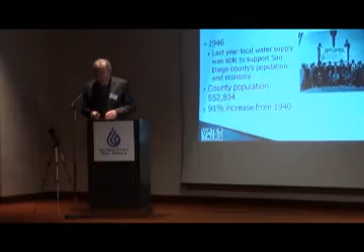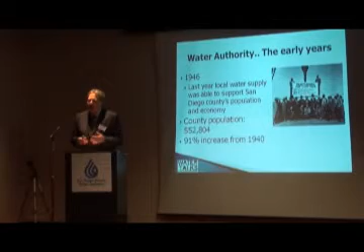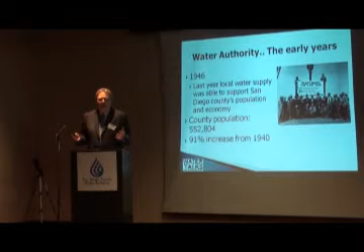Let me talk a little bit about the history of our imported water system. In 1946 was the last year that the county relied on its local water supplies to supply the population of San Diego County. So the local water that was stored in reservoirs was distributed to a very limited area in San Diego County.

During World War II, the population greatly shifted within San Diego County and throughout the state of California due to the Navy presence during the war and the industrial mobilization with regards to building aircraft and other industries supporting the war effort. It was pretty obvious that we needed more water supply to San Diego to support this war effort, as well as to maintain the future of San Diego County as the population increased.

The Water Authority came about by a state legislature to help secure and deliver that water supply to San Diego County. With the assistance of the Navy and the Bureau of Reclamation, a new pipeline was built to bring water to San Diego County from the Colorado River Aqueduct.

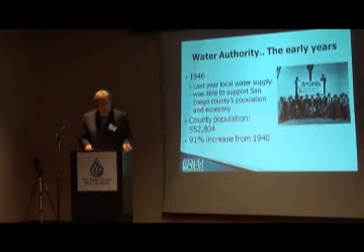The aqueduct actually connected into the greater Colorado River Aqueduct, which the Metropolitan Water District had completed back in the 30s. So we were tapping into that source coming from MWD back in the late 40s. That was the genesis of the imported water system into San Diego County, and also the creation of the Water Authority that oversaw the aqueduct and the wholesale water supply to San Diego County.

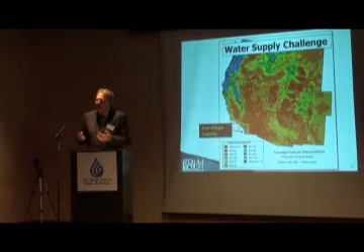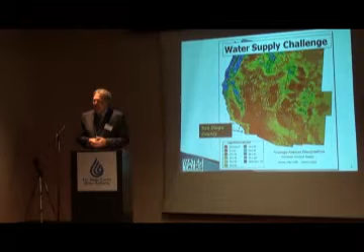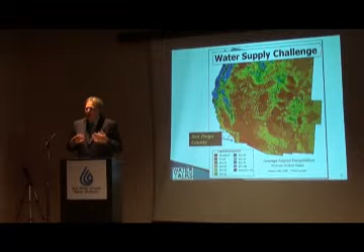Now we talk about challenges. One of them is just where we live. This chart shows that we live in a very arid area of the country, and we average about 11 inches a year of rain. That's on average. For planning purposes, Metropolitan Water District plans that 3 out of every 10 years will be above average, which means we really rely on storing that wet year water to get us through the dry years. It's also a key factor in how we're approaching the future for planning water supplies. Climate change, our natural climate cycles in San Diego County, and supporting our population and our $186 billion economy are very important factors in our decision making as we move forward.

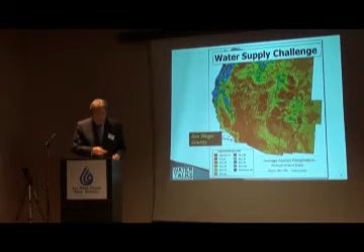We also rely on about 30% local supplies and conservation in San Diego County. This number has increased over the years, and conservation is a very important aspect of our water diversification program. Every gallon we save is another gallon we don't have to develop for local water supplies or import.

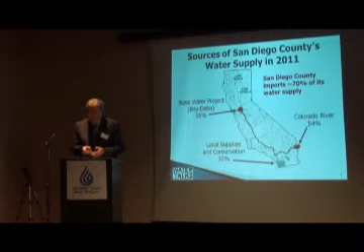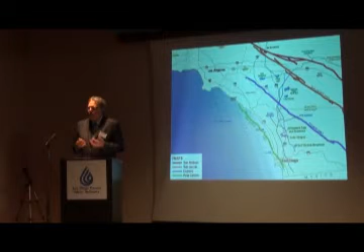Bringing water hundreds of miles from Northern California and Colorado is very challenging, and we're facing a lot of those challenges right now with regards to demand in the western United States, as well as drought and regulatory restrictions. One of the threats we're constantly aware of is earthquakes along Southern California that could threaten the aqueduct system providing 70% of our water supply. Several major faults intersect our aqueduct system in San Diego County: the San Andreas Fault, the San Jacinto Fault, and the Elsinore Fault. Any extreme event that interrupts the water supply through these aqueducts could take up to 2 to 6 months to repair. That's why it's important for us to have a local water supply that can sustain us through those events when or if they occur.

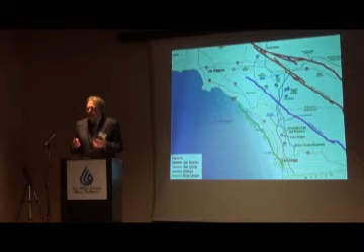There are also challenges in our imported supplies outside of earthquakes: regulatory restrictions, drought and climate change, as I mentioned. There's also increasing competition for limited resources, and something closer to home, the cost of water and the cost of importing water. These are all challenges that water agencies are facing and will continue to face in the future.

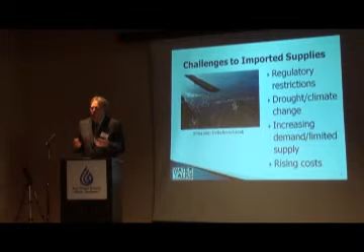We need to ensure we have enough supplies locally in the event we are cut off from imported water supplies. In the early 90s, the Water Authority, recognizing this need, moved forward with an emergency storage project to lessen our vulnerability if these potential problems were to occur. Frank will talk in a minute about our ESP project, our emergency storage project, and a lot of the details of that project, and where we are today and what we've accomplished over the last 10 years.

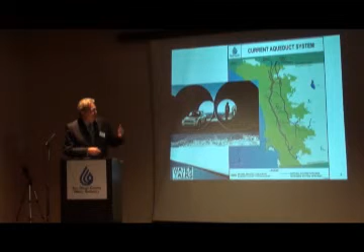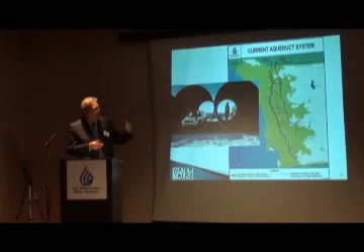Our current aqueduct system operates over 300 miles of aqueduct pipelines, underground pipes, large diameter. This map shows the different aqueducts that come into San Diego County, from North County down to South County. When we talk about the emergency storage project, it's important to emphasize that we're tapping into assets we have in the area to expand our storage capacity, but we're also improving the ability to move water throughout the county rather than rely on just gravity flow, and we're able to selectively operate the system more efficiently in times of need. These pipelines have been built over the years.

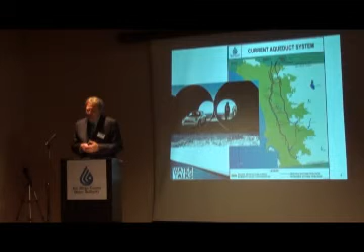Some of these pipelines are 60 years old, and as you can see from these pictures, some of them are very large in diameter. John will speak in a minute about how we monitor these pipelines, and the repair and rehabilitation projects we have in place and are moving forward with to ensure they're reliable when we need them.

The Water Authority's efforts over the last 10 years have really changed things. If you look at our infrastructure investment in San Diego County, prior to 1999 we were really just operating aqueduct pipelines. But in the early 90s, a decision was made to move forward with the Emergency Storage Project and other improvements, as well as the new Twin Oaks Valley Water Treatment Plant, the largest membrane treatment plant in the United States, producing 100 million gallons a day.

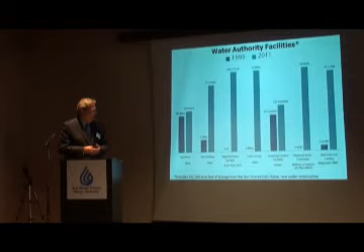We really diversified our infrastructure investment. This graph shows the amount of money we've invested in various categories, such as regional water storage, canal lining of the Colorado River canal in Imperial County as part of the water transfer agreement with Imperial Irrigation District, piping and relining, and hydroelectric facilities. We've also recently started up a very large solar system operation across all of our facilities. If it's not the largest, it's one of the largest - we're one of the biggest producers of solar power in San Diego County as an entity.

All of this is to provide more reliability for San Diego County, to support our economy, our population, and our quality of life as we move forward.

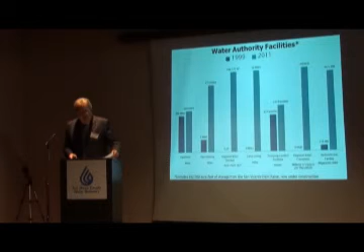In the early 90s, the Water Authority also made a decision to diversify our water supply portfolio. As these charts show, in 1991, 95% of our water was imported, primarily through the Metropolitan Water District. If you were around in the late 80s and early 90s, you'll recall there was a severe drought during that time, with restrictions and cutbacks of 30%, and we were within a month of going to 50% restrictions on our water supply from Metropolitan to San Diego County.

The Water Authority decided at that time that it needed to move forward and not be so reliant on Metropolitan Water District for its water supplies. So over the course of the last 20 years, we've been working to diversify that water supply portfolio.

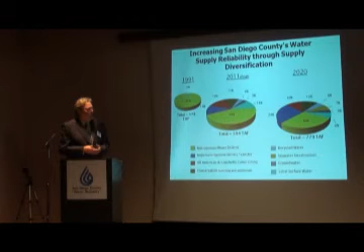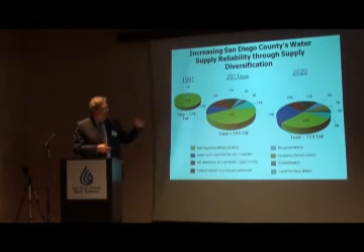As you can see, by 2011 we've greatly reduced our supply of imported water through the Metropolitan Water District, through water transfers, conservation, and local projects such as groundwater, desalination, and water recycling. We've made tremendous progress - this is a great success story, in my opinion, of how far we've moved in the last 20 years.

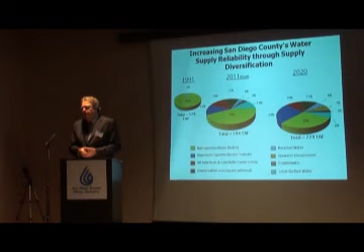By 2020, we have goals to further diversify our water supply as additional transfers and local projects kick in, along with more conservation. Over the last 5 years, we reduced our water usage by 38% in San Diego County due to the public's response to the latest drought and their reduced water demands. Now that the drought is over and there are no restrictions, we're not seeing a very large increase - the rise has been very small to date despite the lifting of those restrictions.

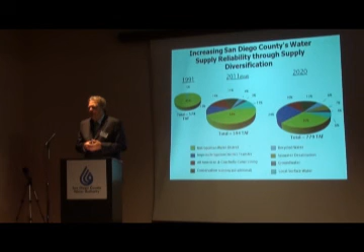So it appears that the public is continuing to use the water-wise practices they implemented in their water usage.